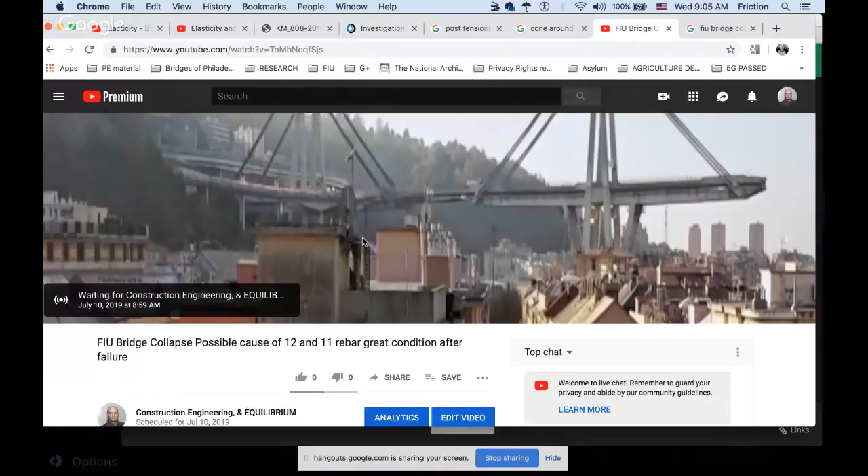Testing, testing. Okay, testing, testing. Okay, test.

All right. So we're going to talk about the reinforcement and why the reinforcement looks so great. Don't want to lose that image, but it looks like I am going to lose it. We're going to talk about why this reinforcement could look so great.

Well, it can't look this great if a force was applied to it. A force that could cause a bending in it, a literal bending, a deflection. So we need to have the concrete fail around this, around it, without putting pressure and deviation on this rebar. Keep in mind, if you put 10 pounds of pressure on one side of anything, you're going to get back 10 pounds of pressure from the other side, ultimately.

Meaning a piece of paper, you put 10 pounds of pressure on it in the air, of course it's going to break. But if you were to keep applying the 10 pounds of pressure on the paper and allow it to take its path, that is down to the floor or to the ground, ultimately the paper will stop and your 10 pounds will be met with 10 pounds of counterforce back at you. The paper may have a depression in it or may not. This shows none of that depression, if you will.

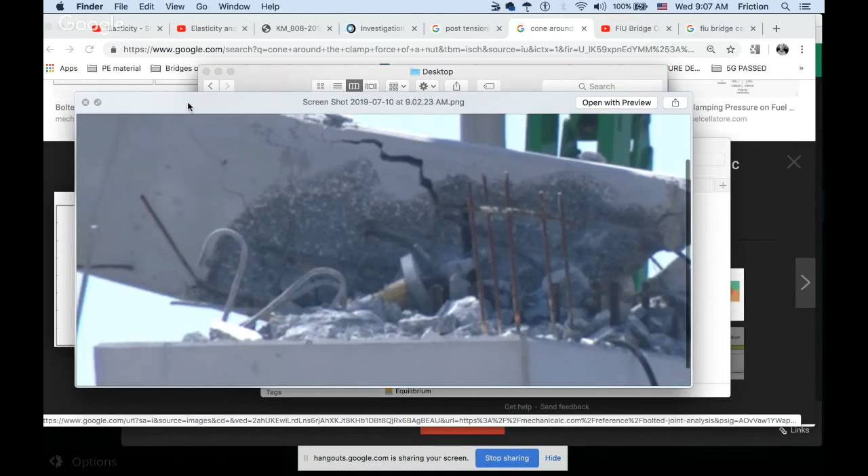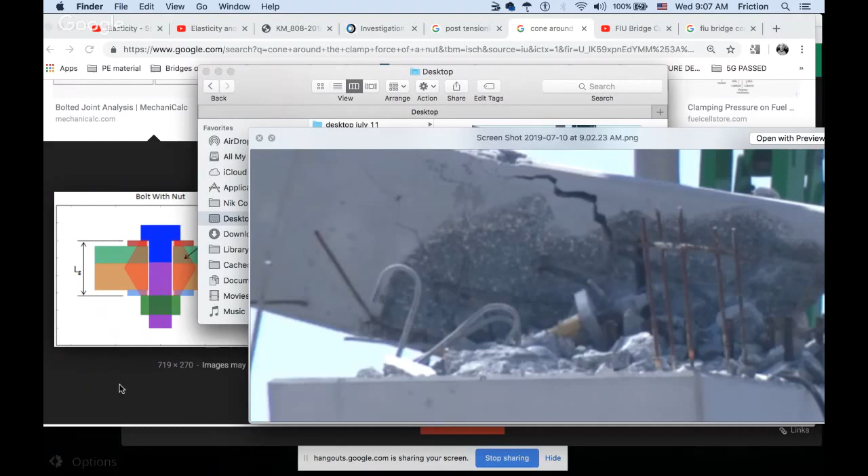So let's talk about what I think can help you explain this. Well, whatever we come up with, we have to have it pretty much that the concrete around it is in equilibrium, fails equally, and releases from around the reinforcement. Do not get confused with post-tensioning, Hooke's law, like a spring loading idea, with the rebar. The post-tension bar and the post-tension tendons are going to act in a different capacity. They're not going to be the same.

For the most part, they're going to give you equal loading on each side of the bar. The tendons in this bridge are going to have different loading on each end of the post-tensioning. They'll have a different force applied. The bar is equal. It's going to give us equal 288 kips, something like that, on each end. The bar has a plate on it.

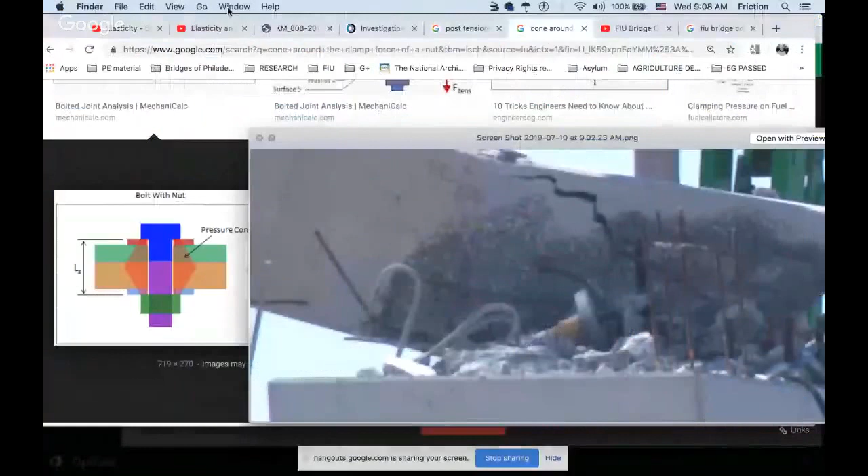I don't want any of my mail popping up just yet, so let's just go ahead and get rid of this stuff.

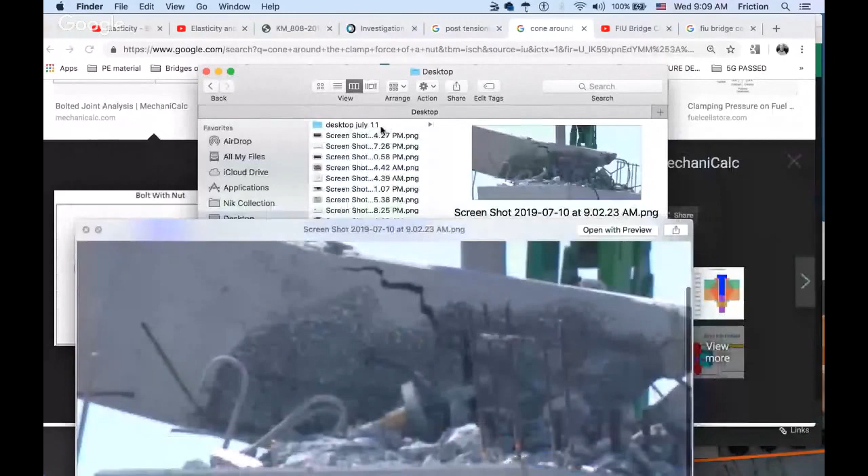So the bar has a plate on it, which will act more like a nut and bolt. With that said, the cone, pressure cone, is created a lot differently than typical. Could grab a different image. Just let me grab this one.

So again, we talked about this in another video where I said it's the back of 12 that could have done this. I know you could probably also say the bottom of 11 did it. Bottom of 11 didn't have any gas in it, as I like to refer to it, meaning no strength left. So I can't imagine it having the ability to do that. Also, you have to account for why the back of 12 is no longer present. The only way you can come up with that is a few ways.

One would be this disintegration, this cone I'm going to show you. The other is bumping here. And that's about it, as I would say, Forrest Gump. That's about it.

Another video, right? Let me just look at the thumbnails real quick. I love fiber. This is metal fiber. I'll get back to that. Another video, other channel. I'm going to race through this in a bit. Stone placement. As you look at the little thumbnails to the right if you're trying to figure it out. Let's try this. Works for me.

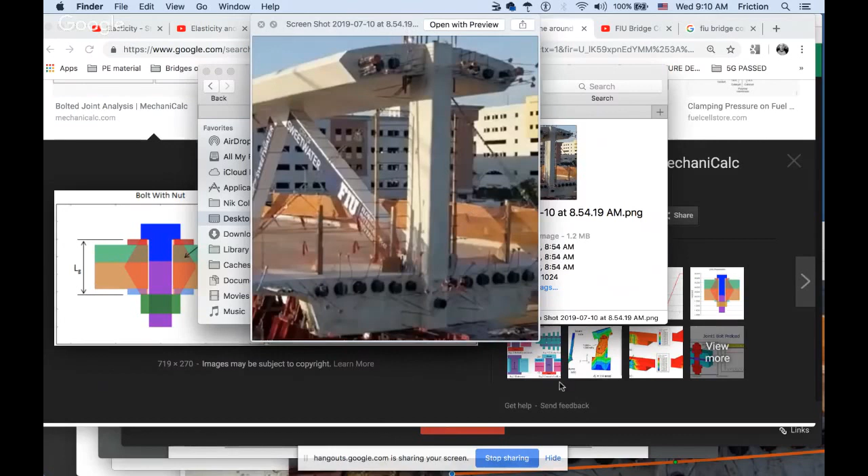So this little blister here, this little add-on to the deck, needs to be resolved. It needs to disappear and leave this. How do we get that? There's a bar inside here. Now, Newton, it's simple physics, right? There must be an equal and opposite reaction for things to be in equilibrium. So if you put 288 kips of anchoring here, there must be 288 resistant force back to it, thousands of pounds, 288,000 pounds resisting 288,000 pounds.

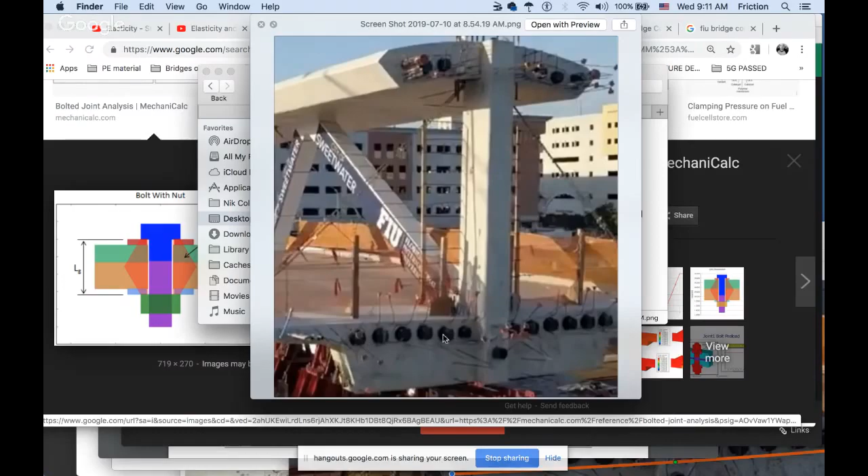This was done when they did this deck post-tensioning. They did D1. This is D1, and that's D1. This has a profile to it. These guys, D1 through D6, they're not all flat, as you can see pretty clearly in this image. They have a profile. They don't go straight across. I would run a line directly across them, which I don't have an image of right here. If I could run this line directly across, you would see that it doesn't work. I put it right underneath of that one, and then right underneath of this one.

You would see the plane is irregular. Well, this was designed that way. And we'll go across the top of number 3, and number 3 here, approximately there. You would see that this is not equal, and this is a terrible image because it actually looks pretty darn equal to me because of the angle that we're looking at it.

Let's move that out of the way. I'll put this one in dead center of that now. You can see it's a slight dip here. And so when you post-tension this transverse cable here, for example, across, if they're all flat, well, this reaction on this one is at that location trying to deal with the post-tension cable that's above it. Hopefully that's a flat cable I've got here.

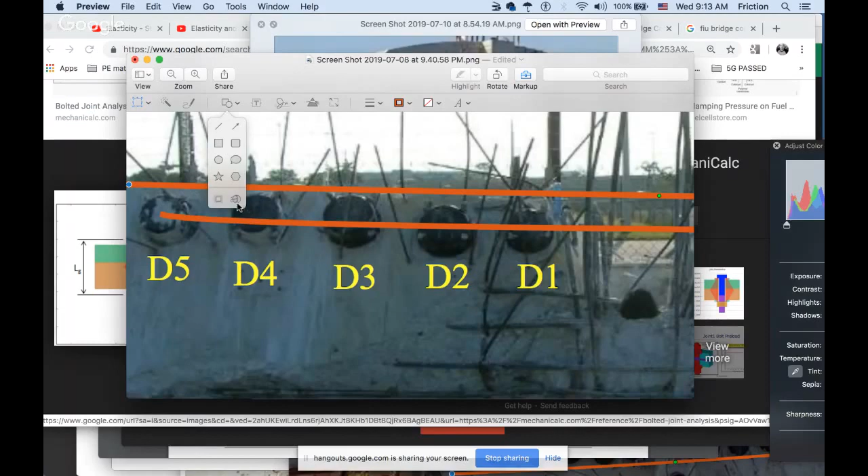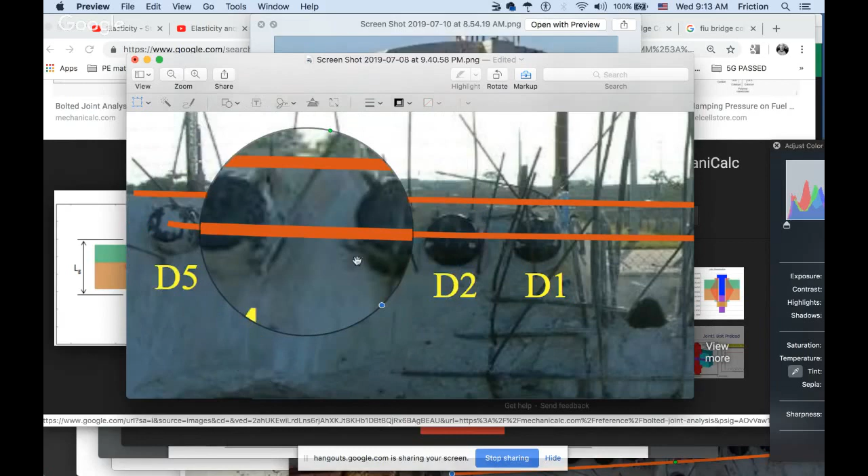And you see that this bridge, if you're looking at this angle, it's missing some materials at the very top. So I got to take a little liberty there, and so I'm going right here at the edge of the deck. There's the edge of the deck. I clip that section. I come to here since I got a flat point, and I try to make it parallel. Looks like I got to come down there a little bit.

Tilt this end up a little bit. Drop the whole thing down. Almost there. Not quite. There's still a skip right here where my mouse is. Come down again. And it's still a dramatic skip. But you can see this bridge. This bridge is not flat. This structure up here is not flat, the image we have.

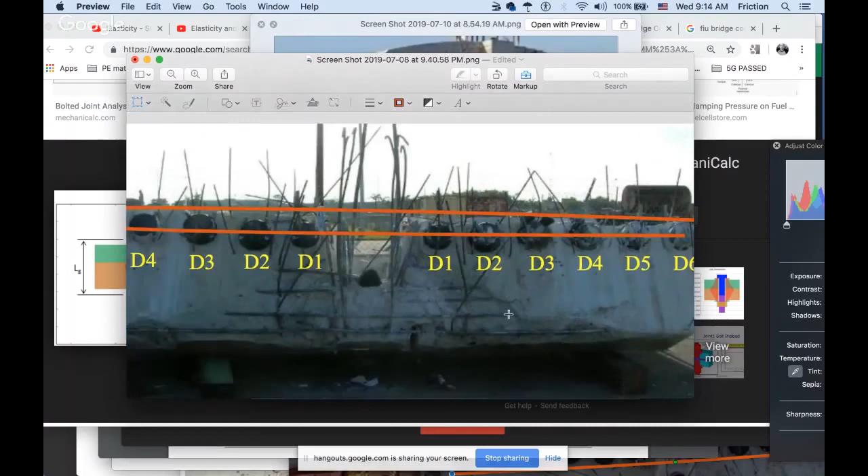So we're looking at a torqued image. This whole base has been torqued negatively or to the right, clockwise, if you will. 12 o'clock here, 6 o'clock here, torquing that way. So I don't know, is this placed evenly or not? And this will give you some false data if you're trying to analyze it.

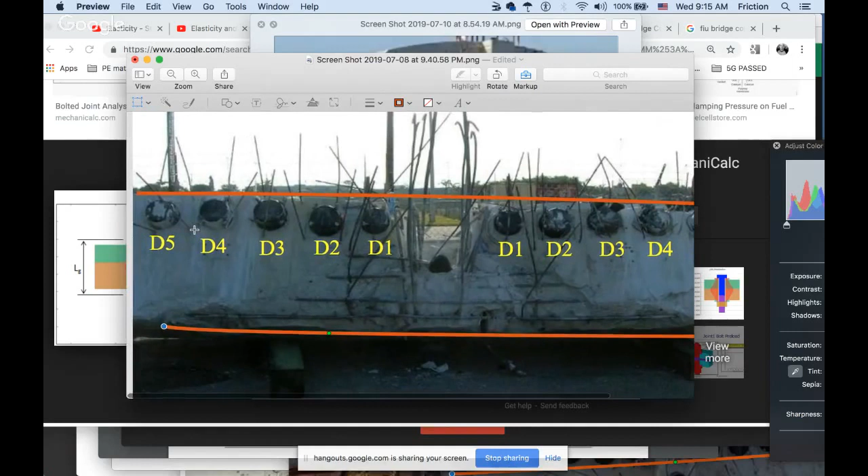But now analyze this. As you look at these 1, 2, 3, 4, 5, well, I don't know where 6 is. 6, it went over to 5 here. I don't know where 6 is on that one, but look at what you're looking at. Use your eyes and try to help out. 1, 2, 3. I like giving hints. 1, 2, 3, 4.

1, 2, 3, 4. Look where my mouse keeps moving around as I'm trying to do it. It's all over the place. It's up, it's down here to count this corner, and then this one over here, it's here. This one here, it's here. This helps you identify the curvature that I'm trying to help you see.

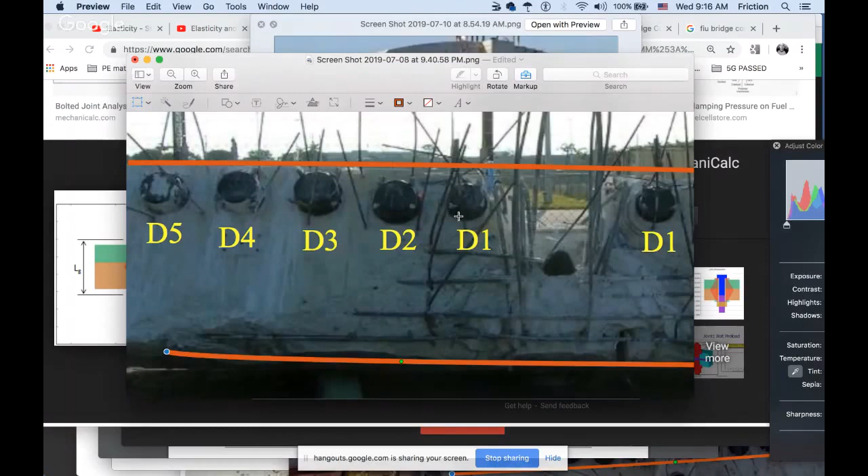Now, really take note of how the guy photographed it, or girl, and how we can see the underside of this. And in this one, it's got cement on it, so it clarifies itself a little bit more. This one, not so much. This one, we're looking more head on, and this one another way. So this bridge that we're looking at, the data we're looking at, is pretty damn torqued up.

We would like to see if it's kind of in balance also, comparing the right to left, but we can't get that. Remember, a camera is going to have the sharpest data we're going to get out of all of these photographs if they're not cropped. If they're not cropped and not edited, the sharpest data, the best data is always going to be the center of the camera.

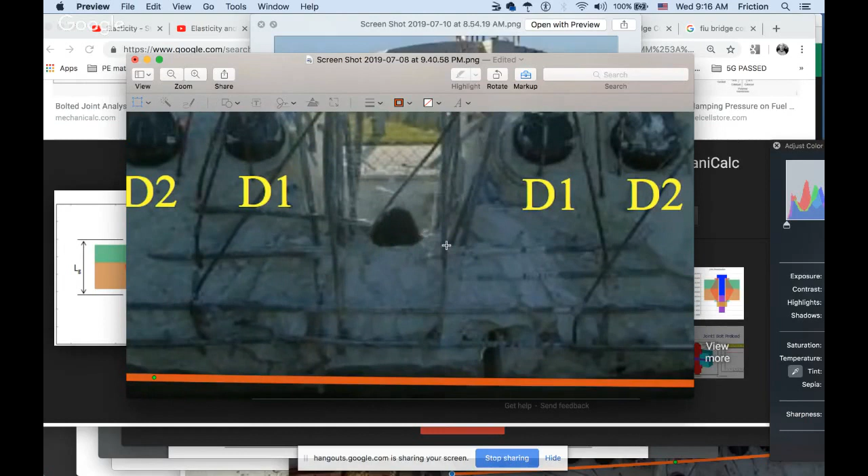Our least amount of distortion will be the center of the photograph, of a non-cropped photograph. And then as it tapers off in this direction, you're going to get your distortion going out to the corner. The most distortion down here, not here. The most distortion, the longest distance from the center, are the corners.

I'm going to put this on each one of the bolts on the ends, 1 and 1. And now I'm going to run this to this bolt, and then this bolt, and then this bolt, this bolt, this bolt, this bolt, of course that one, and that one. Now I'm going to run to the middle of these guys approximately, and you see the profile forming there. It's a downward profile and downward, way up, way up.

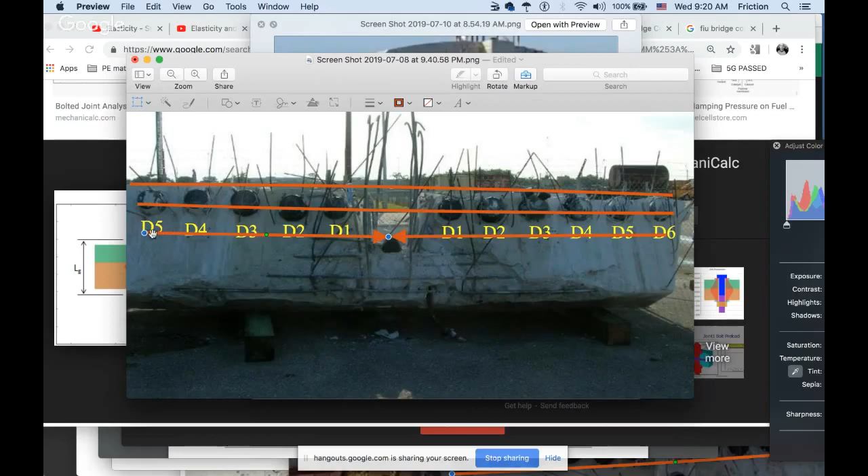Opposite. With that said, since this is pulling in this direction, it makes a compressive in. But these end caps that hold this thing from just breaking free also create a tension in the backside of them. They have a tension, they're trying to separate, but the compressive concrete around it stops it from separating. But it's still a tensile moment back here going on behind these plates. Yeah.

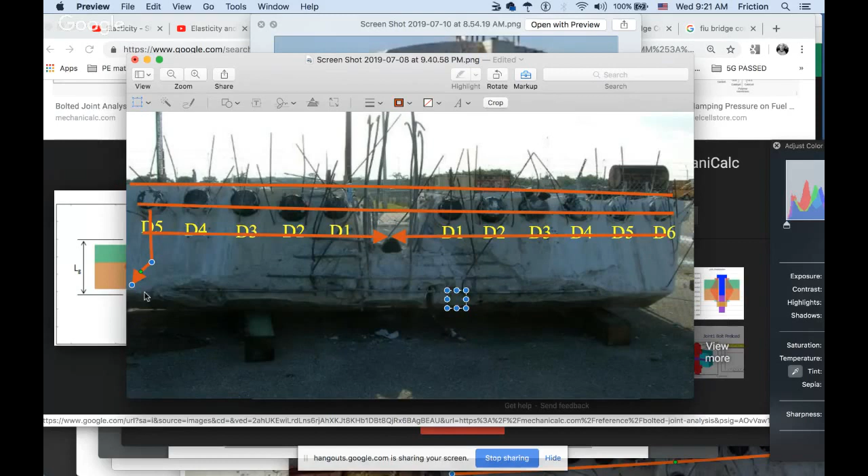Behind the plates on each end, down here and here, as the forces are trying to pull inwards, this plate wants to flex. So you've got another force that is kind of sitting there, on these corners. I put it on the corners. And that corner up there, kind of sitting on here, wanting to do something here.

Looking at bolted joints, so bolted joints on your engines and things like that. It's not typical, as I just showed you here, where I stated it's sitting there on the corners. Where it's sitting here, it's a cone, a pressure cone. That is what they theorize. It's a theoretical pressure cone, but this is the way they've determined the cone looks, in a free body diagram, if you will, this graph.

And so it would look more like a creation of this triangle here, kind of inward and outwards, right? As you can see there, kind of like that. And we'll straighten that out a little bit. So it's got this plate on it. This clamp force, these tubes have been reported to be ducted, to be grouted. Which changes it, it reduces the ability to slip, that's for sure, if it's grouted.

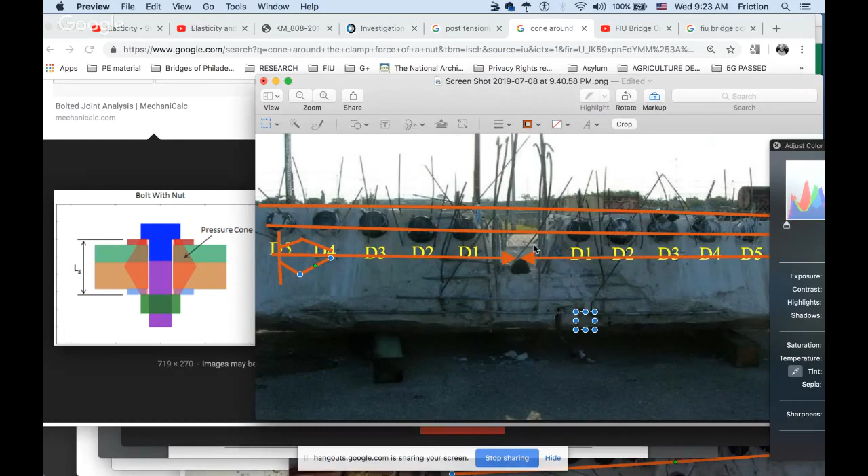But I state they were not grouted by the time they were post-tensioned, because they didn't show that as part of their process of grouting, I mean, of tensioning. They didn't say tension number D1 and then grout D1. That wasn't on there. So it's like a cone. Let's just take a little exaggeration of my beautiful artwork. So these forces around here, and on the opposite end, cutting to the chase a little bit for you guys, because I have to cut to the chase.

This is B, this is A, and this is B. This is in the deck, and this is in the diaphragm, and out in that little blister hanging out there, the one that's missing out here, that's not present. This, you can imagine, is a cone here.

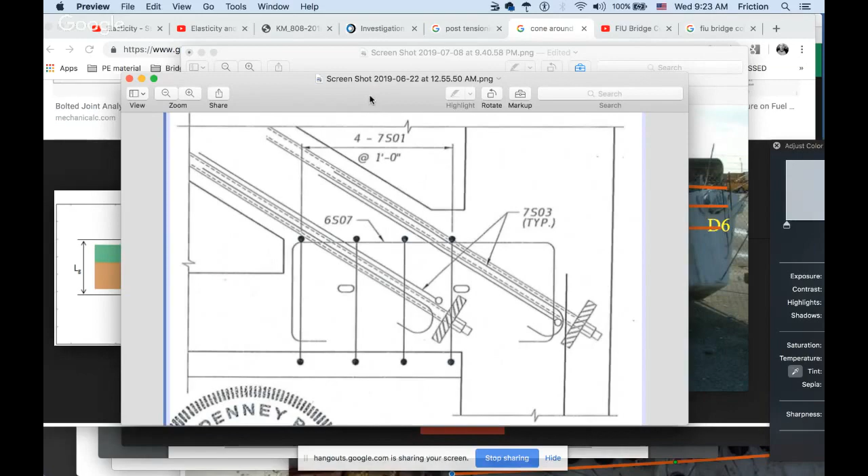This cone of influence is here and here. Cone is coming across here and here. That's a great amount of force that when this goes to fail, this is the part that will blast apart, freeing up this J-bar, and the same here. So this is what I think can explain the release of the concrete around it.

And that would be here on this blister. So here's our point inside here. Now this is the true image in the air, and I didn't deflect this line. This is a straight line we're looking at. I put it underneath of here just by a clip. And let's do this magnifier.

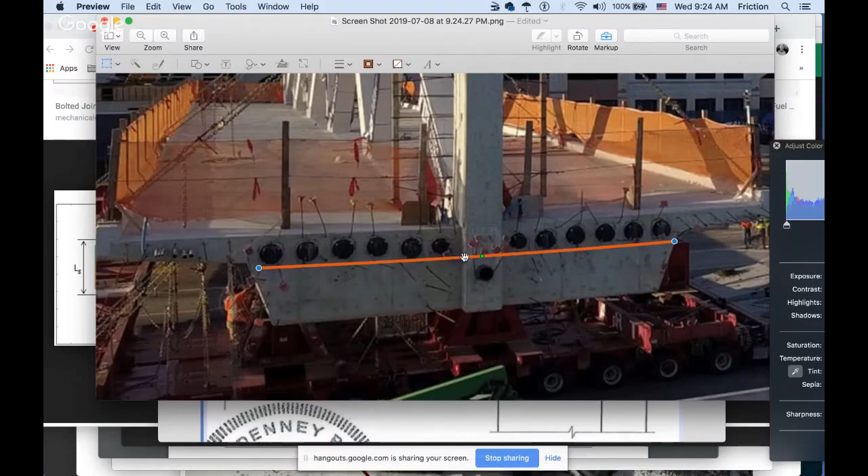But remember what I said, that the cameras distort as you go to the outside edges. This appears to be closer to the camera than that end, so even that matters. But the profile is stated as such. It is stated that it will be profiled. So these are not designed, as you look underneath of the line there, not designed to touch each other. That one's touching, to be in plane with each other. They're designed, that one's deviating. They're designed to be up and down.

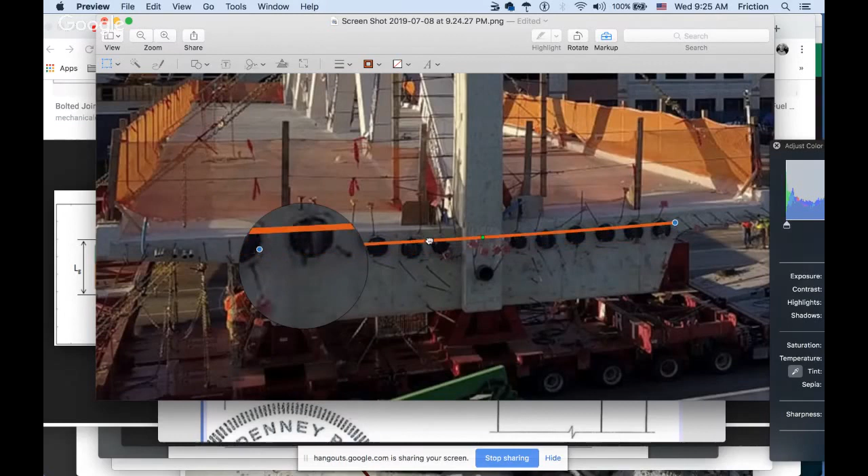With that said, they're supposed to be in equilibrium from left to right. So this one and this one are at the same plane. This one and this one is exactly at the same plane, supposedly. And the photographs are really bad, but I want you guys in other forums to really investigate how this should work. These are equilibrium going across. So yeah, this is higher in here than that one. But all I care about is D1s being in line with each other.

If we could find a photograph of it cracked like hell, you can start seeing if the post tension is failing, or do we have failure also of change of direction inside D1s, D2s, D3s, D4s, etc. This would have been data that would have been awesome to have when you were doing your analysis before they just started post-tensioning, to confirm that all these were at the same, that the post-tensioning didn't take on the new profile, which would have been crazy dramatic forces going on there.

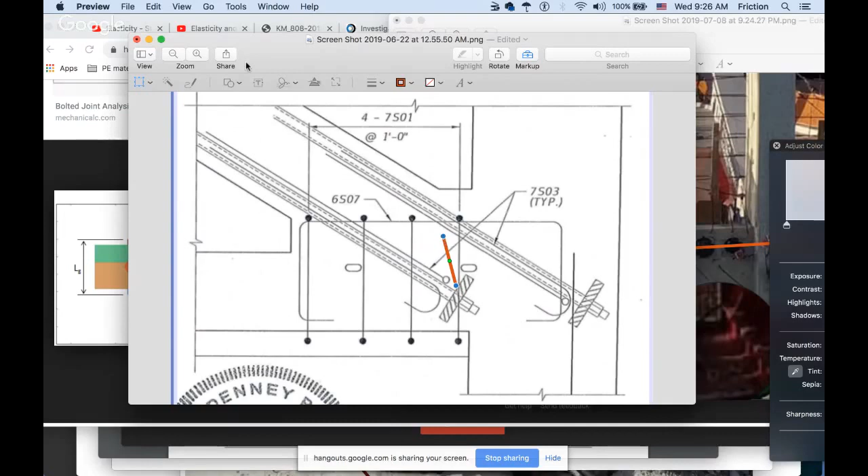So there's our cone that I just described to you. Now these cones will overlap each other. To help you visualize it a little bit, let's do this. Take a little liberty there. That's the default they're giving me on the length, so I'm not going to change the length on default. So that gives me my symmetry, if you will. Well, it looks like I just changed the length just then. Line it up with that.

So this is the cone. There's the J-bar. You then duplicate the same thing down below. You start seeing these cones are starting to overlap each other a little bit. Starting to have a little conflict with some of the forces. I don't have the rotation one on that, so I'm just going to do that.

So now if you look up Hooke's law, it will deal with the spring, and start talking about being equal in forces. But they don't deal with the loads at the end of the plates like this. It's just showing that forces are equal, proportional, and how to measure it. In this case, these are not proportional and equal because each end of this structure and the tendons have a different clamp force, a different ability. So don't assume that you have one end of the deck figured out and you figured out the other side of the deck.

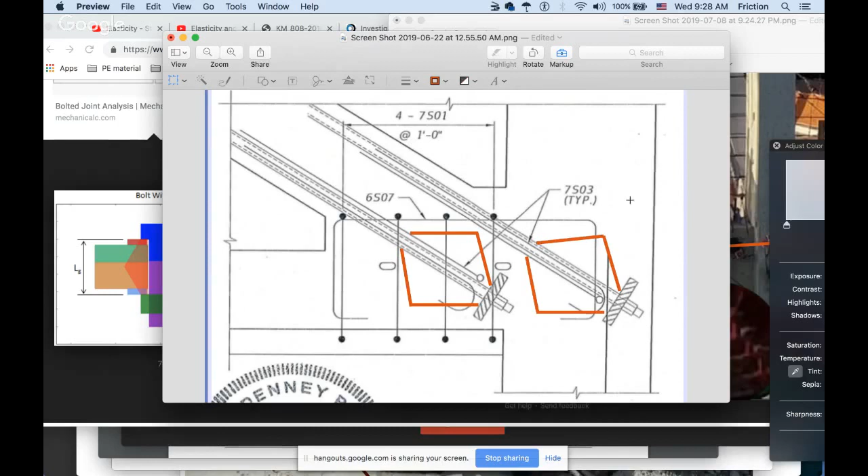So the transverse cables have different loads on each end, and so do the longitudinal cables. But the bars are totally balanced. They're equal with whatever force is applied on one end is applied on the other end. It's a bar, not a spring, not a tendon. Okay, so this is what the force is, just giving you an idea, and you guys can look this up, I guess. Bolted joint analysis, MechaniCalc.

Well, pressure cone is what it looks like. It's not quite the 45 coming off the edge of it, but I think there is a 45 coming off the edge of it. But their thinking is this. I'm saying, well, then what do you need the plate for? If there's no extra load coming out here, well, then we don't. This extra plate is just on there for no reason at all.

So I'm saying that the theoretical pressure cone is out here and not here. Their thinking, though, is your load. See the nut, the bolt is actually, follow that down. There's the path starting here at the bottom, back of the nut coming through.

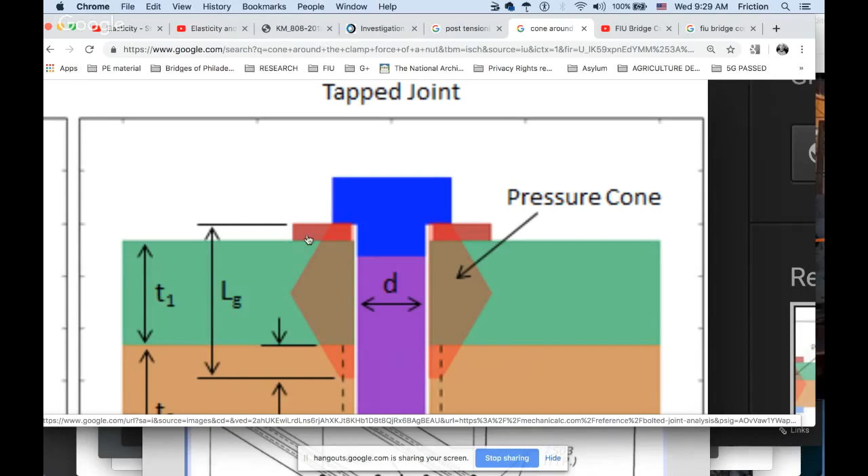But the plate being thick enough, I think, pushes it out to here, where with no deflection it equally loads this, and the pressure cone is out here. With that said, this is like the free body diagram. You see the loads are coming out here, and what are they doing then? Well, they're bouncing back in the direction they came. So I would think that, yeah, there might be more loads here, and then it slowly tapers out to here. But nevertheless, it's still out there, is what I'm driving at. So if you could extrapolate what I'm saying,

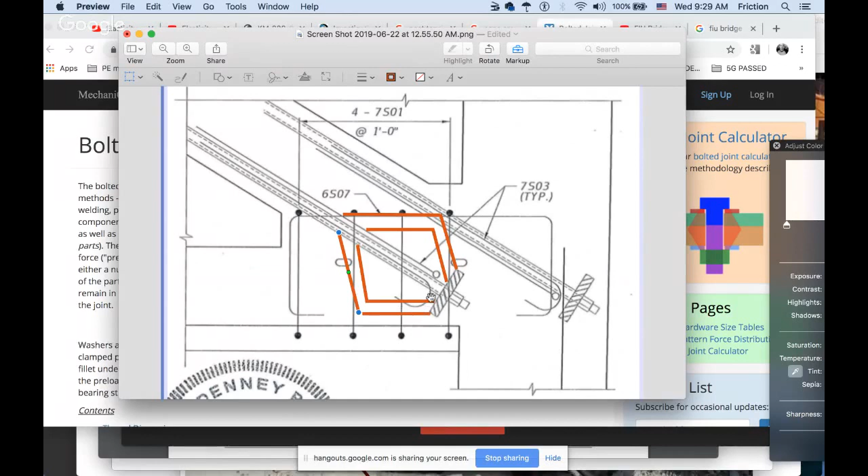leaving this like that, I now grab this one, and maybe I'll overlap it and show you an overlap of the forces coming off the base of the plate using the 45 and pressure cone analysis, meaning I'll come back inwards. Now we're totally encompassing the J-bar right here. And we just crossed into this moment, creating a moment here, very beautifully creating a moment here of all things.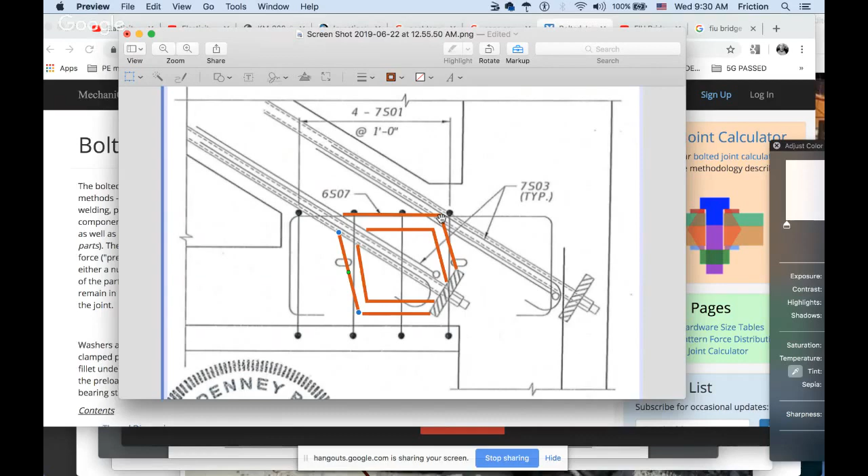You know, you've got to be careful of your biases. And so I'm biased at this point, I'm corrupted. I'm corrupted in that I'm looking for a reason why a crack exists all the time. And what I'm about to give you could be very biased. So you've got to take it with a grain of salt, because I would need further verification of this. But I want to show you a crack that's been driving me crazy that the pressure cone would resolve for me.

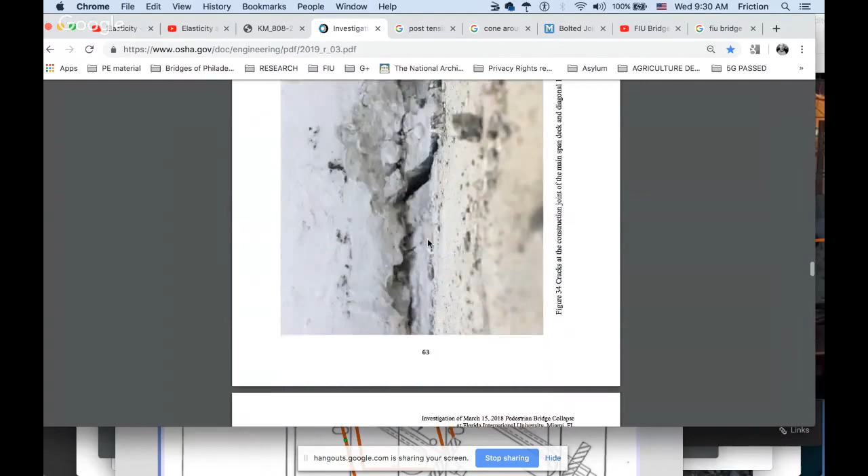And you know, I said I have to resolve every single crack, or I don't have it. I'm getting close. I'm there, but if I don't resolve every single crack, I don't have it. That's my statement. I can't give you 90% of the cracks and say the other 10 don't count. They were created by forces, and if I can't explain those cracks, then I can't explain the forces truly. I'm 10% out. That 10% could be 100% off.

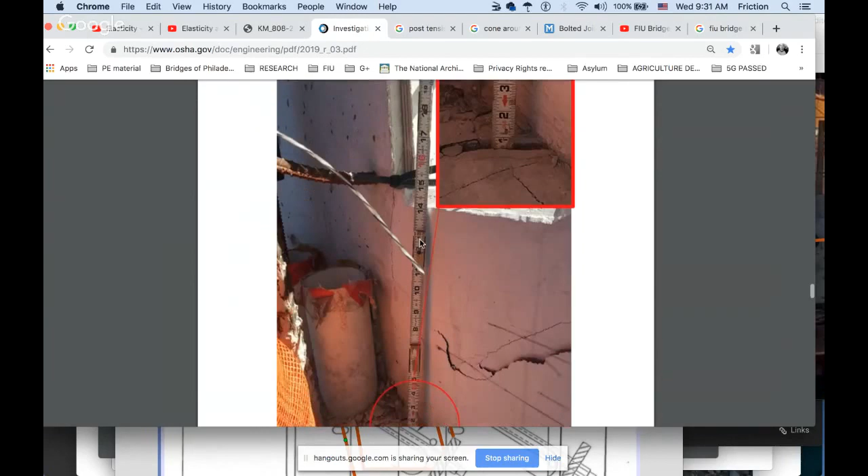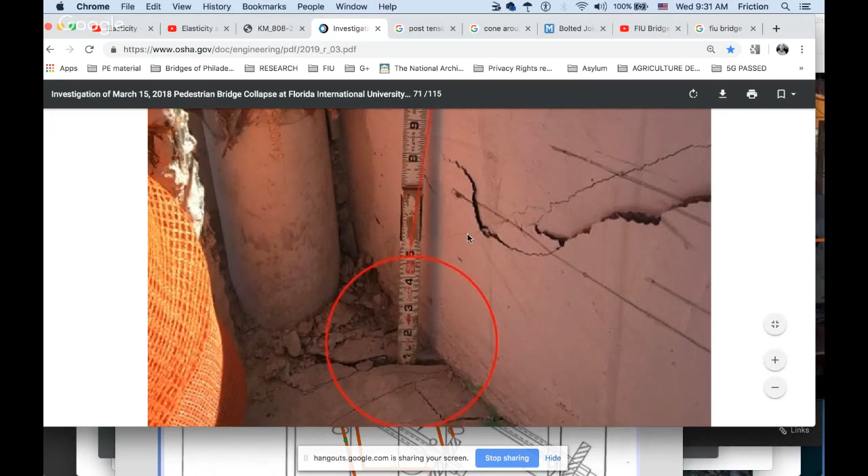This crack here is the one that's been driving me crazy. This one. If you look at this, it's just 1 inch into the hole using this side of deck, or it's 3/4 using this side. So at 1 inch, I can use this line here and I come up 5.5. So the reality is this crack is about 4.5 inches off the deck. I can now line that up with the post tension bar and try to figure out if it's in line with that. I use that same 1 inch on this side.

I come up here and I notice the crack starts deviating right about 8 inches and stops about 10 inches, which is really 7 and 9 if I take 1 inch off, approximately. I can verify that with the top of this, if I can figure out where they placed that. This is even with the top of this plastic. I then can go from 10 inches up to where it stops here, and this is where the direction changes. So I can say that's pretty much 4 inches, give or take less than an inch. It's about a 4-inch crack.

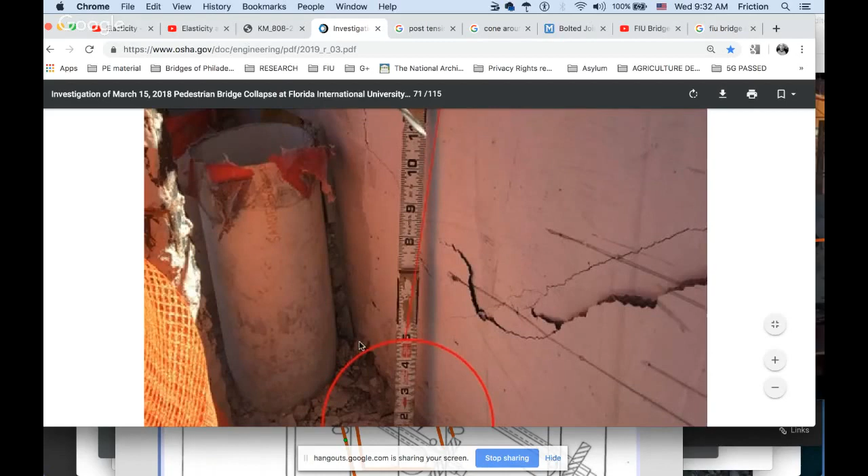So somewhere on the other side, but there's the deck here. That's what I was trying to resolve. So somewhere like that. And this is the pressure cone, which could create a tension crack, a pushing effect there, pushing 12 back away a little bit. We have the forces coming down, trying to keep this section in compression, though, also. So let's go ahead and put the other pressure cone on here, times 2.

Whoa. You know what? That would have worked, wouldn't it? Nah. The pressure cone appears to be more angular in shape. The liberty I'm taking with trying to flex it would not be fair.

I'm not trying to do any cheating there. I'm just being lazy and just throwing them in, sort of making them work. So I'm not saying this is the exact pressure cone dimensions, because I would guess the pressure cone dimensions would change based on the pressure. So as you add 50 kips, the pressure cone is smaller, and as you get to 280 kips, I'm just going to balance it out, the pressure cone would get larger.

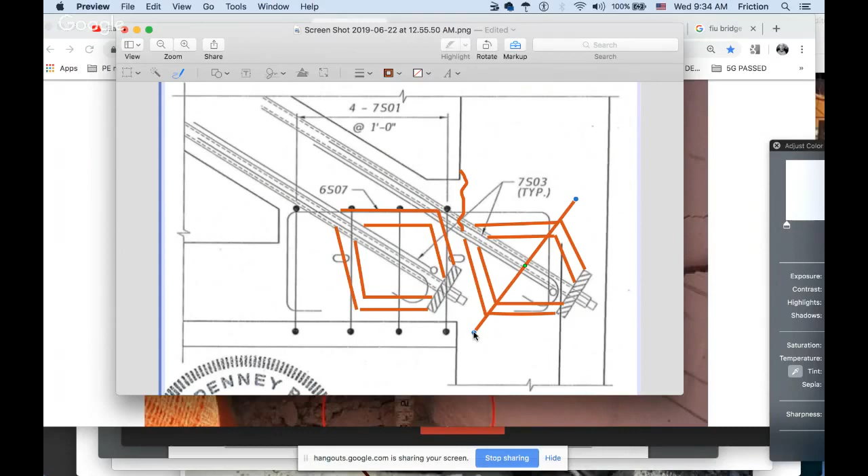I'm just trying to see how bad my triangle's off by using a straight line, and they appear to be off pretty good. Well, they're almost parallel, these two. So this would be like your pressure cone area. As you can see, this pressure cone area comes back like this, and that's the line also created on the deck. That would have that lifting effect of 12.

I told what's his name? I forget his name. A man from Jersey. I said, give me a minute. You know, I got other videos I was going to show on counter forces in many ways.

So this counter force is pushing up also, as it's creating a clamp force in this direction and a downward clamp force in the other direction from the other guy, putting this member 11 in compression. But it has no choice but also to go through this decking area.

And going through the decking area, you can use a few things here. Hooke's law, you can use the cone and the bolt theory, which here's the back of the bolt, the nut. And I guess I should have moved that over just a little bit. Now the load path would be 45, so let's do that. Let me clean that up a little bit.

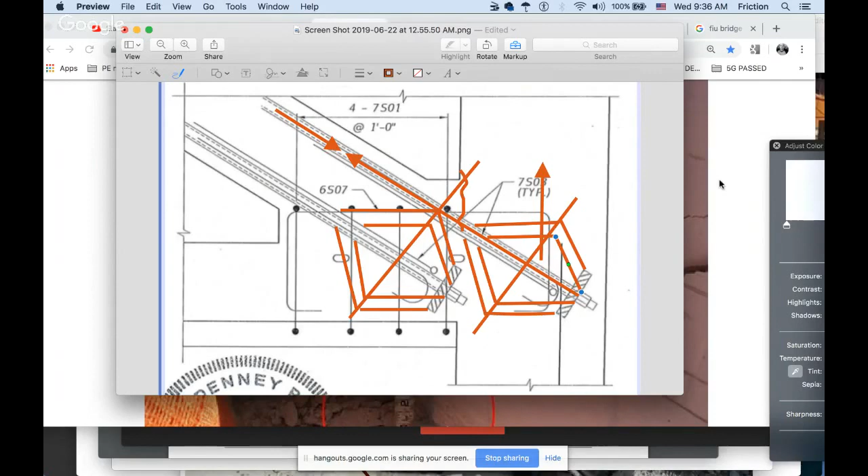My luck, I'm talking right now and there's no damn audio. Let me check this. Hold on. You guys got audio? Hey, Embry. Nobody trolling? I know. Well, you're here, Embry. Come on. No, I just dropped in here. 9 o'clock in the morning. No FIU bridge people at 9 o'clock in the morning, I guess. Let me confirm my volume. Here, Embry. Yep. Oh, the delay is very small, too.

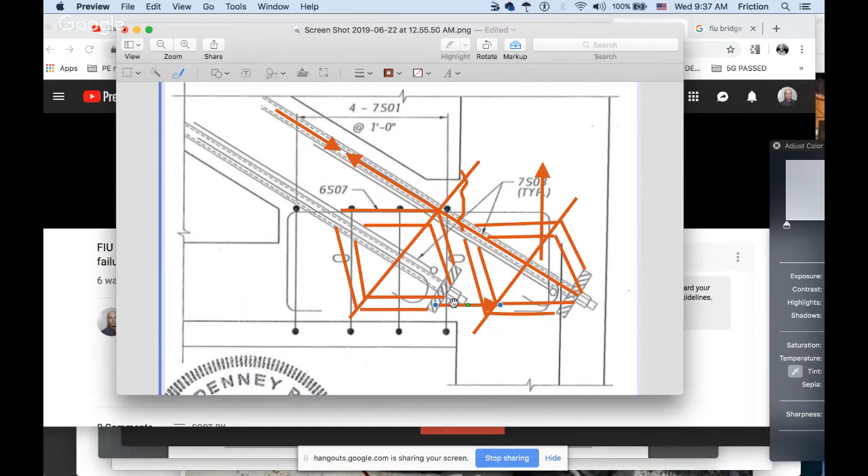So now here's our cone, and you can use Hooke's law, which is a spring deal, pulling back. Now, don't forget, though, if this is pulling that way, it's creating a tension in the back side of this. It's not for free. You can't just pull anything in one direction, right? When you pull on something, it pulls on your shoulder at the same time. Well, I would theorize, and I have not seen it, that it's a reverse cone.

That's my theory. If that's the cone there and everything's equal and opposite, we have a reverse cone going on, right? Well, we know it's not equal because 280,000 pounds of force would just have blown this out. So we have to determine, if everything's equal and opposite, what would it take to blast this off, and then say, well, this cone must be limited to this equal and opposite.

It's just a thought. Or we say tension in concrete is not what we think it is, because they don't do tension in concrete properly. They don't do it as it really fails. They don't really measure tension properly. They use a splitting technique, and I think this 10% rule of tension is way off. I go out on a limb with stuff like that, but I don't think the way they're measuring tension in concrete is correct, because equal and opposite, it's just weird, right?

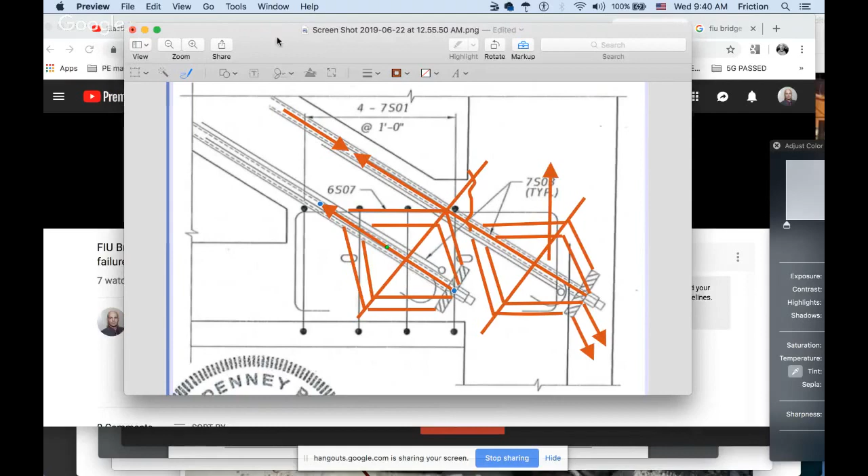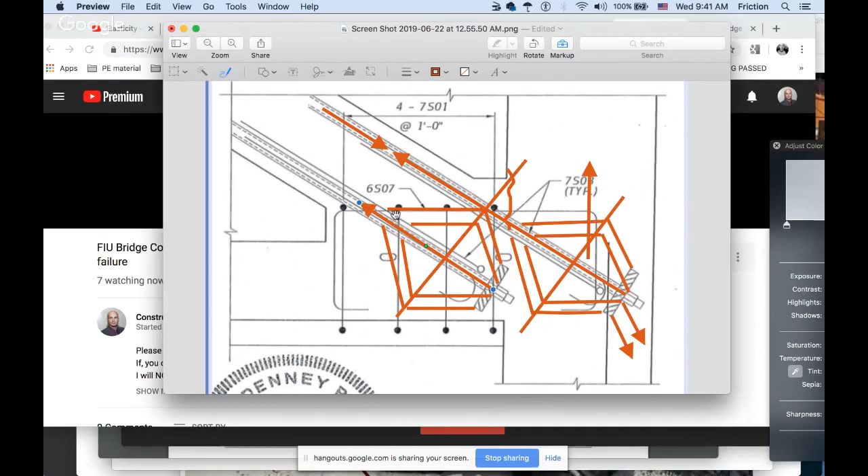This stirrup appears to be in line with our cone force. So, my theoretical cone force, and that's just by luck. I didn't do that. I did it live with you guys. I didn't do that trying to be biased on that one. Maybe subconsciously I did it. So you can see that would create a bending in a compressive moment in your stirrup system, right at the top of where they're interconnecting, sort of in that theoretical one.

I just want to give you the cone thing again. Where you go, cone? Cone head. Oh, it's in a tab. Okay. So there's both the joint analysis, right? You guys can chase this down for some time. Here we go. This works for me. There's a cone again to the right. There's your cone. There's your zones. There's your pressures. It's your computer analyzed pressures. Here's another version of it.

That's all. You guys are upset by that? Then I troll. Then you've just been trolled, and 20 points goes to me for being able to troll you. I have a new joke about being trolled now with points. So if Embry wins on a troll like he did the other day, I give Embry 20 points. We hear you. Hey, Cognitive. So my friend and I joked around. We were driving yesterday in the car. I was getting points from him left and right. I was purposely messing up his sentence, like I was repeating it back and getting it wrong. Of course, I was firing him up. And I was playing. You guys don't know, I play too much.

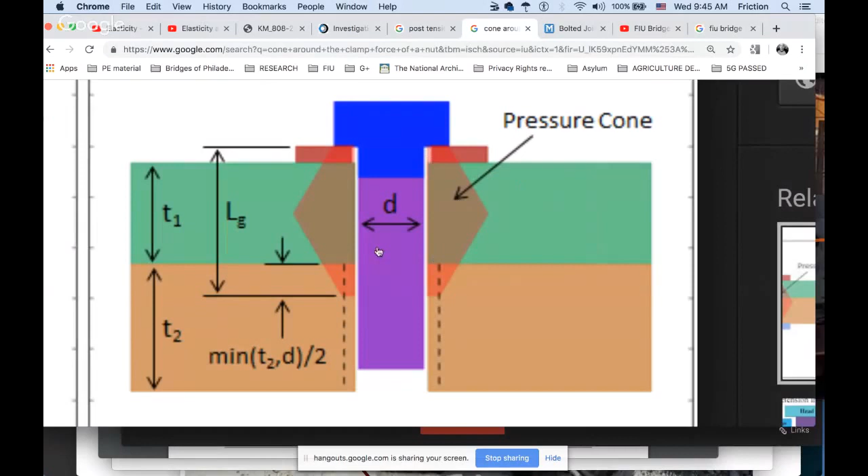And this is why they did not close down the structure. Their egos all jumped in, their triggers all jumped in. I can't be the one. I can't have messed up. So they try to fix it. Although Denney Pate's admitting that he's made a mistake because he's showing that he needs to do some repairs to it. But instead of them acknowledging it, going, "Great, Denny, you're admitting it, and you don't know what the cracks are," which they now brag about, saying that Denney Pate didn't know what the cracks were.

Well, you guys remember that I stated that if Denney Pate or any engineer comes forward stating, "Oh, I know what was wrong with the bridge all along," then that means they should have known then also. They can't come forward. So all these engineers stating that Denney Pate did not know, for example OSHA, and at that meeting, Denney Pate didn't know where the cracks came from. They all should have said, "Wait a minute, you don't know where the cracks come from. You cannot be given an analysis on how to go forward from this point then."

Until you know where the cracks came from. You just can't treat a broken bone if you're just going to send a person right back into the broken bone factory where they just break bones. You can't do that. You got to find out what did it. The doctor's joke: it hurts. Why does it hurt? Because I keep doing this. And the doctor says, "Well, stop doing that." Well, in this case, they didn't care what was causing the breakage. They just said, again, they're too big to fail.

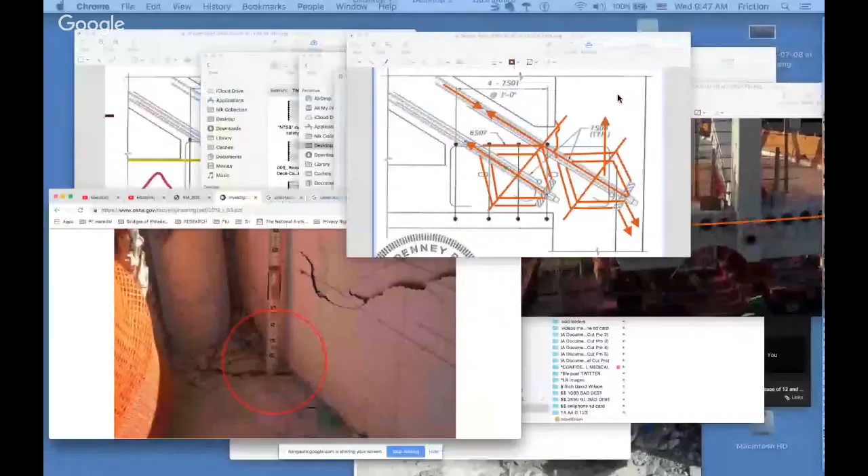So now I think I'm figuring out this crack here. This one here and this one. This is all part of the zone of the post-tensioning. And this is on 3/14 after the release of the loads. So the release of the loads, remember, everything's opposite and equal. And I said I would show this. These arrows here are going to explain it. So if this was holding everything together, because remember they did D1 first. So text D1, and I'm saying no grout at this point. So I don't care if they did grout. There is no grout at this point because no one's stating they grouted.

Escape and delete and grab. So no one grouted D1. No grout at this point.

And I want to say ones. I don't know, I just hate the word ones, believe it or not. It triggers me. Ones. Philadelphia, a lot of people say ones. It pisses me off. Ones, D1s. I never understood that for meaning multiple things. Saying one and meaning multiple. To me, that's like a conflict. Those two don't work together in my brain. So that's not a pet peeve. That's some shit I got in my brain.

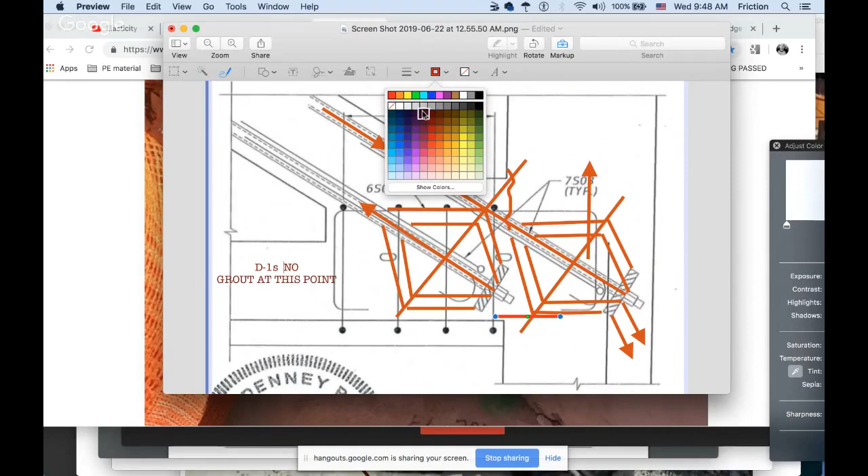So here's D1. So D1 comes across here. And let's change the color for D1 to a violet red if we can. And that didn't work. Let's go with blue. So D1 is coming across here somewhere. I don't know where. So right about here. You see where I'm going with this? So we got text.

But here it's designed with, let's get a plate. So there's your plate behind D1 on the outside of the deck. So you're looking at D. Great, awesome. And it's got a little bit of bow in it. Oh, it's the middle. So you're looking at D1 right here. This is D1 and that's D1.

So this is all they post tensioned so far. And then they're going to post tension this guy up here, A and B. B is the critical one, not A as far as I'm concerned right now. It does create a shear moment, I think. But that's another video. And, well, I guess I'll give you part of it now. But you see the crossing of that already between these two. You're creating a shear moment in there, but it's supported at this point in the staging area.

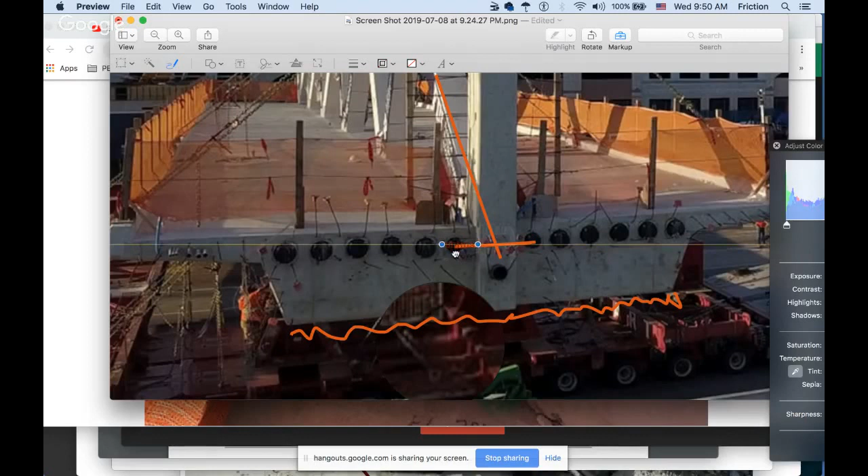In the staging area, it has shims underneath of here. So shims are all here holding this up. Shims with one S, right? There we go. So nobody sees it as a problem yet when they go to test it to release it. But Denney Pate did say grout the underside of this. But I don't think he understood the importance of it. I know MCM didn't understand the importance of grouting at that point.

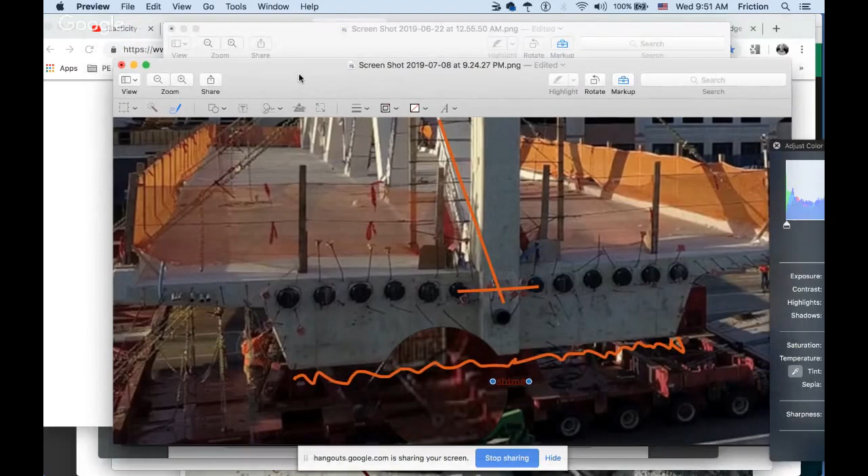The reason why I said I don't think he understood it, because they were chasing it. They didn't know why the failure was there. All Denney Pate did was point at MCM. Now here's one other option to that. Denney Pate did know that the shimming was the problem here, and he wanted to not throw MCM under the bus at that point, because it's a partner of his. You don't want to throw your partner under the bus, not knowing the bridge is going to fail. You would have thrown your partner under the bus, because clearly MCM is throwing Denney Pate under the bus somehow. Anyway, they're fighting each other with lawyers.

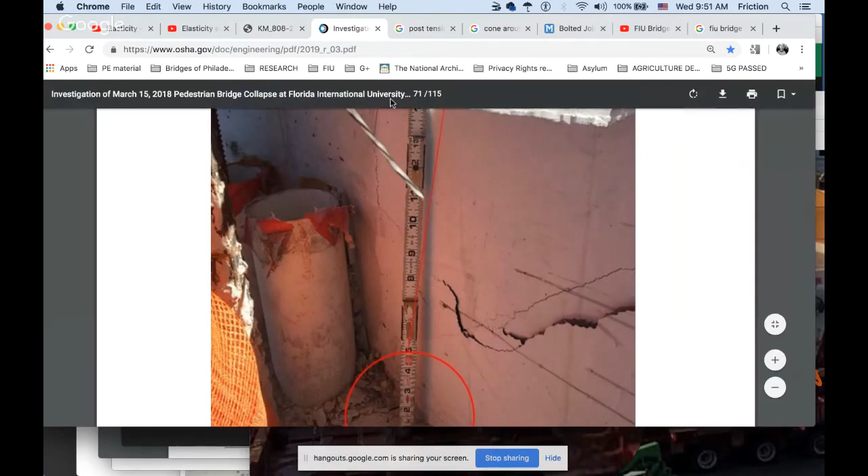Then I think we have the zone there. Where's the zone? So we got this guy, but remember they did a certain detail to avoid conflict zones. Conflict zones. And I'm going to use yellow. See, the mouse changes, so I got to start out here. So this is their way of spring loaded, if you will, to counter the forces they're applying in here to make it nice and even. But it still doesn't really work, because this end of the structure still gets less post tensioning than the opposite end.

If you guys saw my other videos, I showed that this end is less than the one to the left, the south end. So all the engineers and everybody else talking about it, just look at the post tensioning schedule. It shows you that the south end and the north end are totally off by thousands of kips in their ability to support and make a clamp force. This being the least amount of clamp force down here. So you got this clamp force coming across here in D1, non-grouted at this time, and these are not grouted.

Then they add the canopy, and that would be the canopy here. So the canopy comes across, and that would be the same as the one down below. This would be the same. These guys. So D1, no grout.

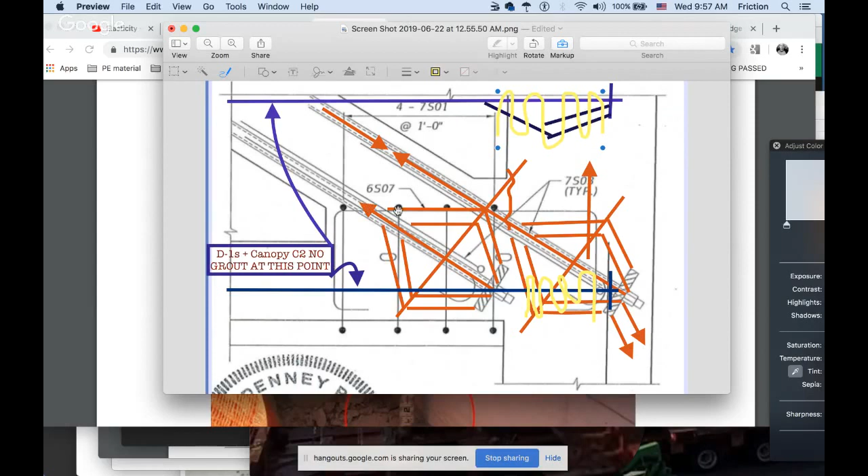These are just pieces put together with rebar holding it together until they put the clamp force in. So I know I gave you a bunch of data right there. So listen, this deck was done along with the blister. And then this was done. The only thing tying it at this point is the formwork holding it up and the reinforcement rebar. And then the canopy was built on top, and then the blisters.

Now imagine right then, if you did not add any post-tensioning on any of the structure and you just removed the scaffolding, what's going to happen to the structure? It might stay in balance for a while, and then it's going to fall over. It would be beautiful to know which way it would go. Computer modeling obviously told them which way it would go, I would hope. And then they added the forces to stop it from going in that direction. Obviously, the computer modeling didn't work.

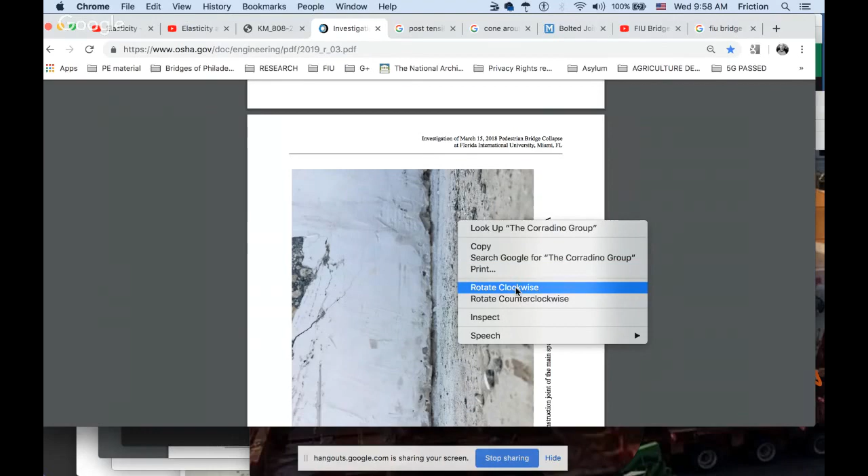What holds the whole bridge together at that point is the canopy, keeps the canopy deck flat by the post-tensioning in it. It also is held up and supports. Let's go to a quick image here of the rotate right. So rotate right, and I'm gonna end the video with that. I think rotate clockwise. So let's look at the pieces. We're going to look at it in my favorite way to look at it.

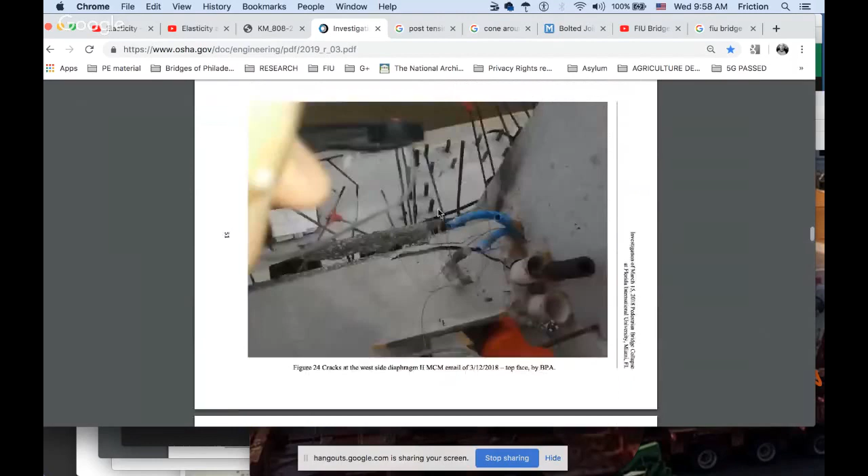So there's these guys. They're not in alignment. As you can see, this is up here. These bolts are here. These bolts are down here. These bolts are here. This is here. It has a weird-ass profile that goes in line and then drops down and then in line again. I think that, but it doesn't appear that way. Shit. I don't know where the VSL things were.

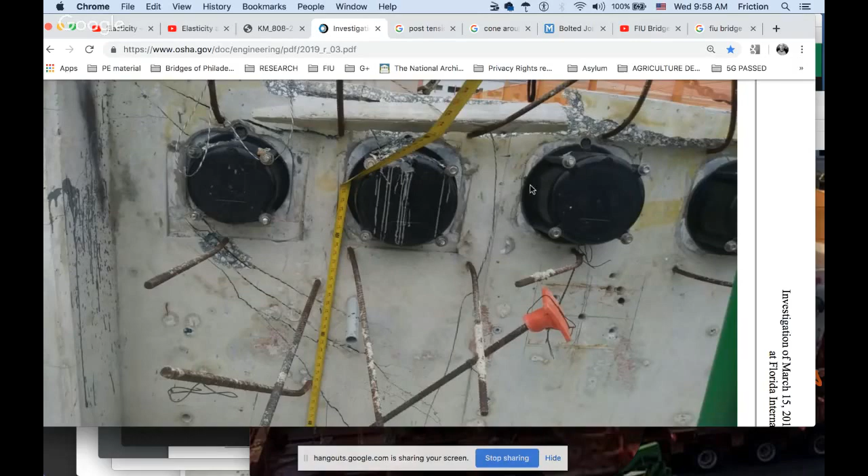I showed them in another video, the profile, and it shows that it's like a foot difference. It's a major foot difference in profile, but yet I don't see a foot difference here in real life. That's quite disturbing to me. But you can see these aren't in alignment. You look at it straight up and down, you see they're not in alignment. And yet a crack like hell already took place.

So are we already looking at a deflection in the deck? That this is already taking a torque downward. I wish they'd had more deck images. I swear that there's some cracking going on out here that they're not disclosing to us. Right here in this bad boy here.

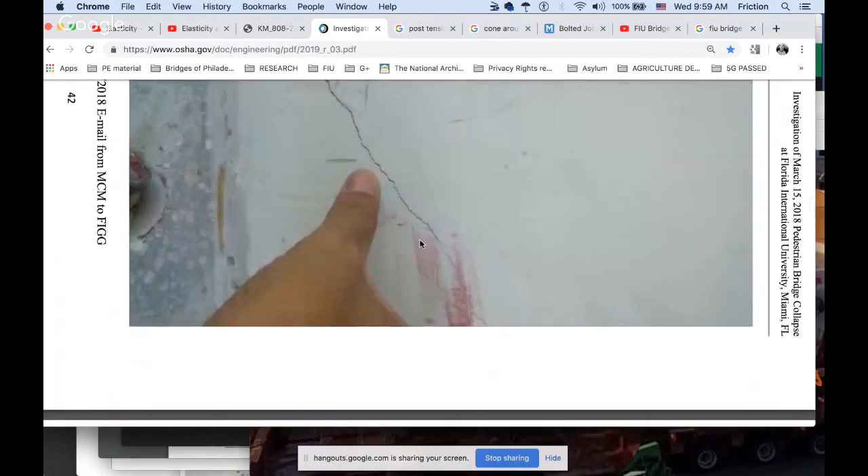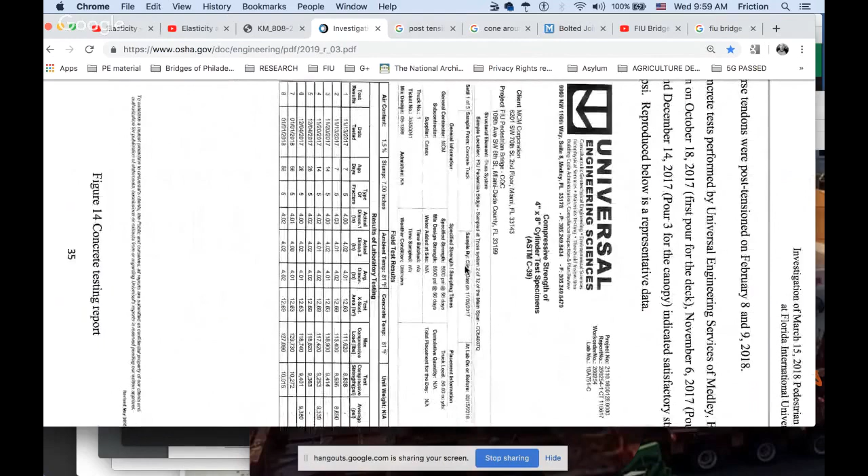Oh, you know what? I could use this one, but let's use the scaffolding one because it describes what I'm going to describe much better. So let's get to the scaffolding. Oh, scaffolding. Oh, that's concrete testing, wasn't it?

Now, can you imagine if the scaffolding is not holding 100%, you're going to get a false reading as you do next. That scaffolding better be holding the 100%. I was going to do a whole nother video on scaffolding and how it could have signaled, it's going to be the canary in a coal mine.

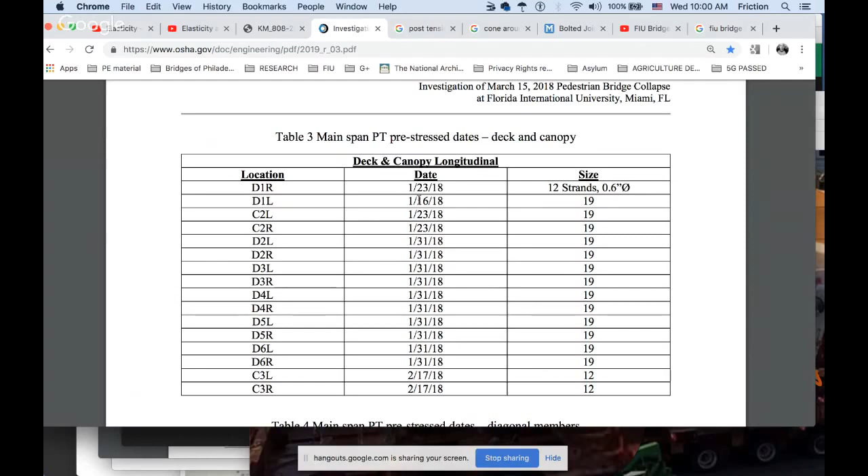The scaffolding was. If you're post-tensioning anything, and as you're post-tensioning it, you evaluate the scaffolding. If one side is becoming under compression, one side under tension, it's telling you what your post-tensioning is doing right then to your deck, where it's reacting. It's like a free body diagram offered up to you using the scaffolding. I always try to find something in real life to verify the forces, and I use things like scaffolding.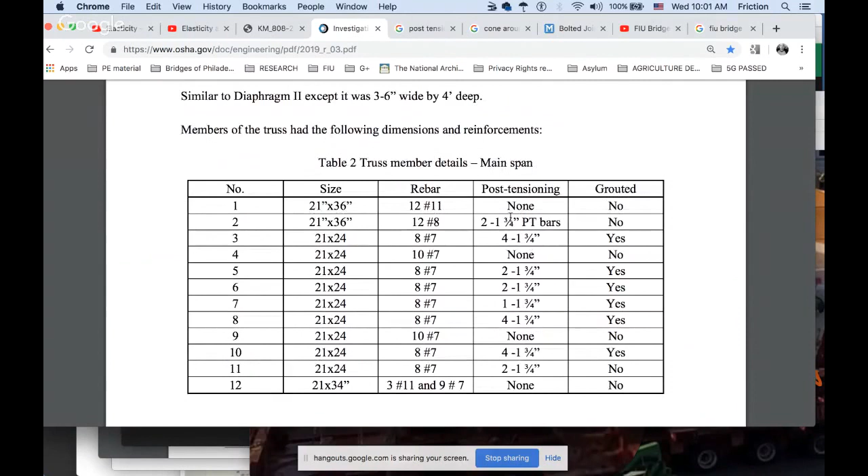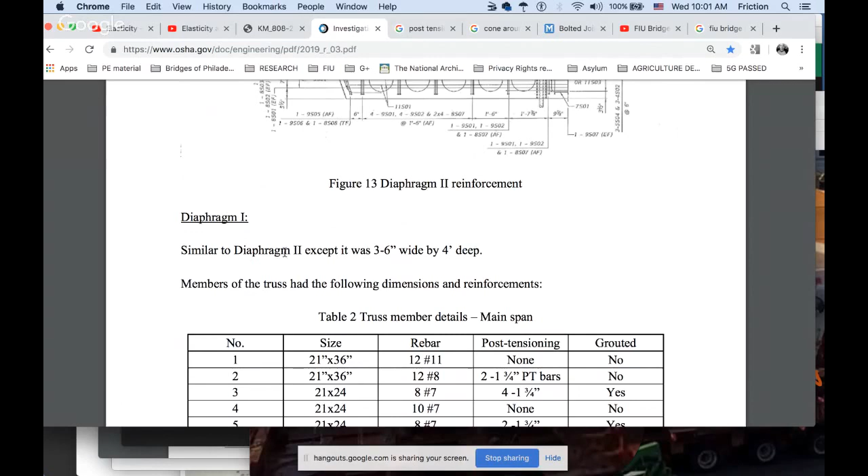Diaphragm 1, similar to diaphragm 2, except it was 3'6" wide by 4 foot deep. It is not similar. It is no friggin' way, and believe me, I want to curse, no friggin' way it is even similar. They're nowhere similar, the diaphragms. One is larger, one has 2 post-tension bars inside the deck. One has one in the deck, one going through, and one on a blister, if you will, that's in the deck pour. One has it going partially through number 12.

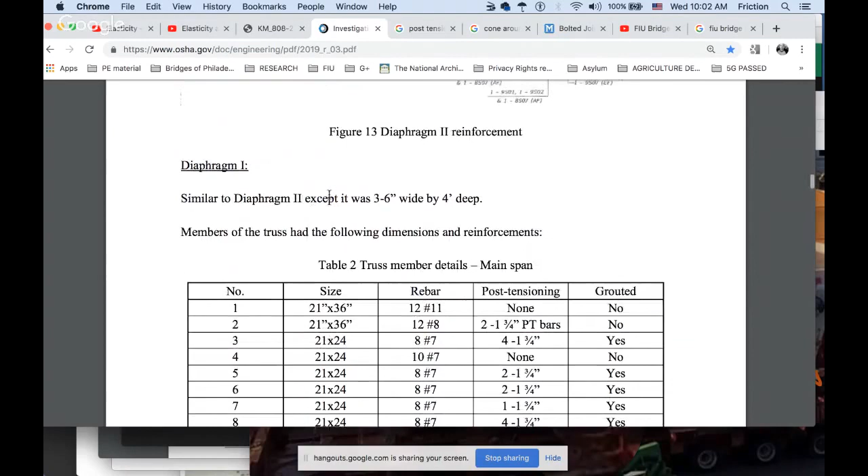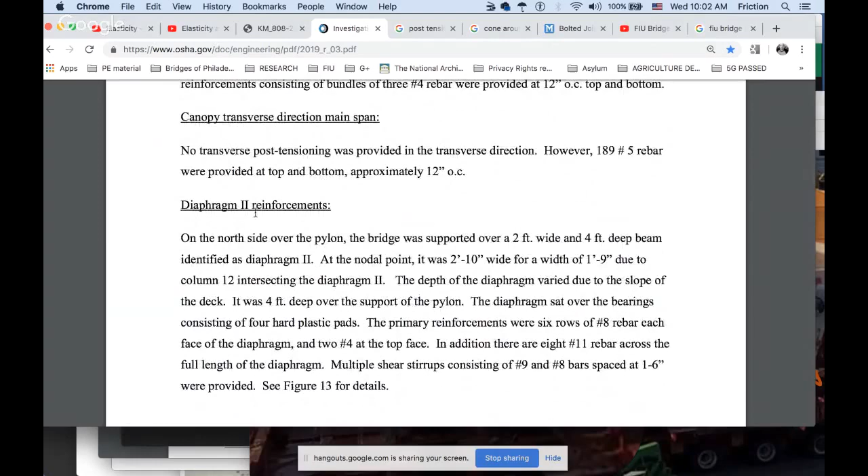The other one on the other end has it not going through number 1 at all. They're not even similar. It's not even the same thing. One has a hinge, one does not. One has the 10 inches sticking off the deck, one does not. One, the post-tension bars go through a 3-foot member, and the other one, a 2-foot member. They're not similar. Engineering-wise, they're not similar. Diaphragm 2 was supported over 2 foot wide and 4 foot deep.

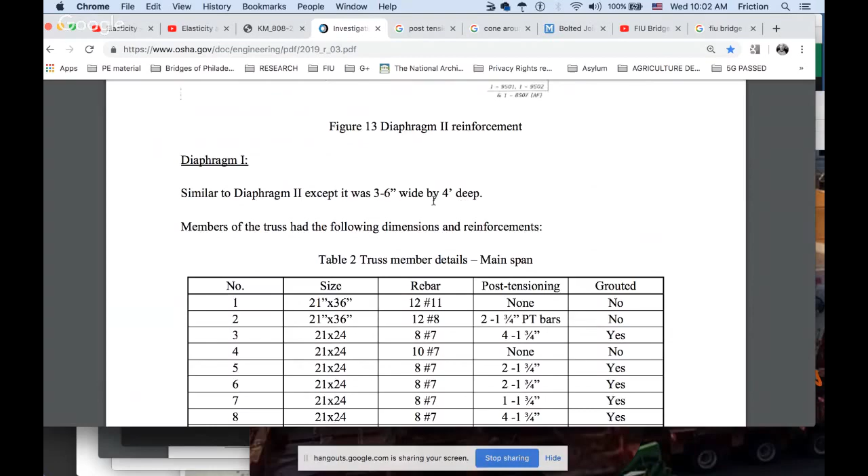What does 3'6" wide and 4 foot deep have in common? They've both got 4 foot in common. This one says 4 feet. That one says 2 feet. I would say 1 foot 6 inches is a huge difference in the base. So I find this to be nefarious in its wording.

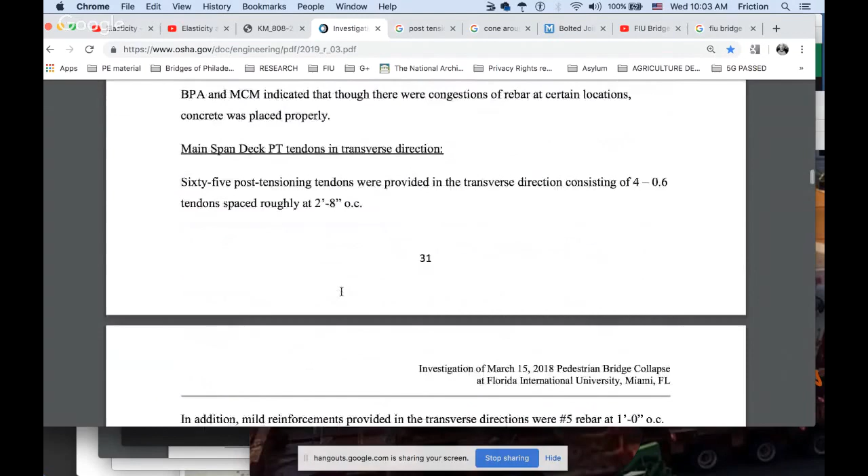I'm never going to get that guy to compliment me again in my videos. I burned that bridge. Get it? Burn that bridge. All right. Hey, this is for Embry.

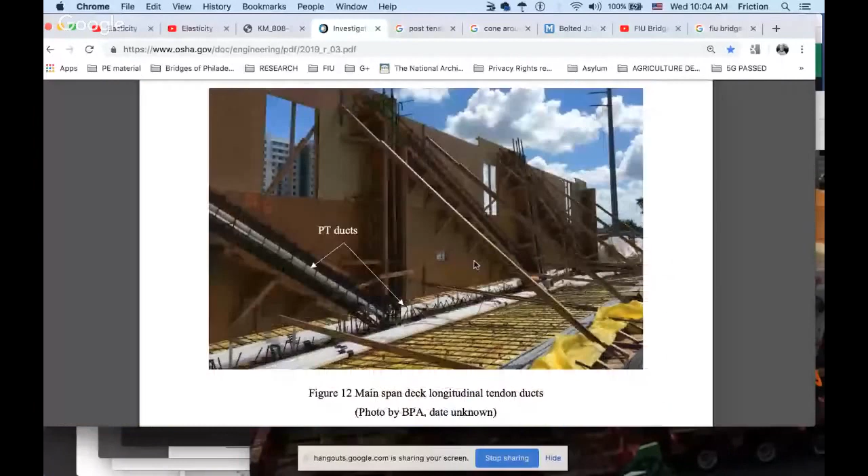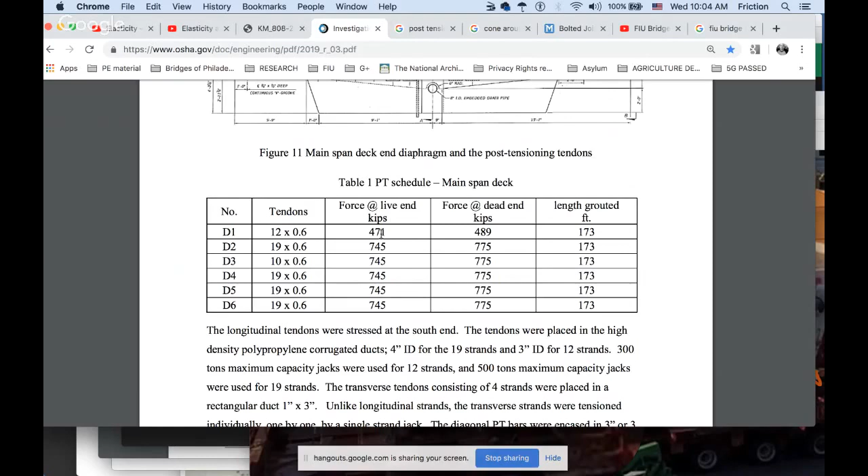D1 was 489 kips at the dead end. At the live end, it was 471 kips. Live end is where they post-tension on our end of the deck. That puts it off balance. So it's not the same from diaphragm 2 to diaphragm 1. Diaphragm 1, the larger one, has 489 kips, 489,000 pounds of force on that end. And on our failing end, we have 471,000. See, it's an imbalance in the deck.

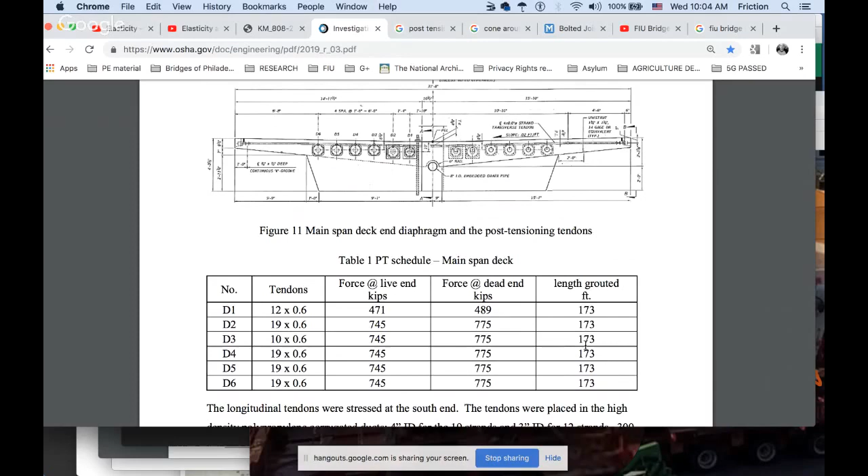And on the rest, D2 through D6, we still are in imbalance. We're coming up shy on the failing end of the structure. Down here, we're 745. That's an imbalance. It's 173 foot long. I'd love to know the elongation of each one of these. I find the imbalance in this post-tensioning to be wicked.

All right, so getting to my darn scaffolding. Command right, clockwise. So scaffolding is the canary in the coal mine. When they detensioned D1s, 20 points goes to me for triggering myself. Anyway, D1s, they would have seen, doing a survey, the reaction in the deck, literally a survey of the concrete, which would have been the best way to do it.

Or you can just use the scaffolding and try to figure out if you see any bowing or buckling, which would have been amazingly skillful. You'd have to measure it, put a string line along it to see if it's deflecting, basically. The string line is probably the best choice. Laser would be another one. It's just too many to do. You just had a guy out here on a piece of survey equipment. He'd be able to sight down and go, hey, we got a deviation in the deck now.

When you did D1, we got a crown here. Or when you did D1, we have a bow here. When you did D1, guess what? This took a torque, and number 9 or 7 is now rotating to the right or rotating to the left. This stuff is sort of idiot-proof that way.

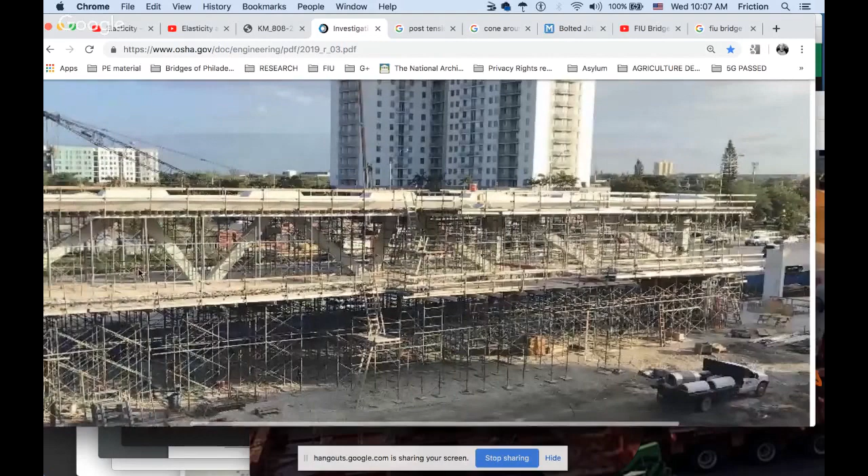Here's the question I asked you guys. Why didn't they just do number 11 and number 2 first? I'm being facetious. Clearly, when you post tension number 11 and number 2, no forces will go down 10, and no forces will go down 3. So you don't have to do C2 or D1, do you? You don't have to, because all the forces, when you put this in clamp force with your post tensioning rods, just stay right out here in the ends.

I'm showing you they knew that's not true. They knew forces were going down 10 and number 3. And they said, we only need a little bit of counter forcing for that. We're going to use D1 and C2 to help keep this rigid while we do that. Miscalculation, screw up, and they didn't add the grout inside there at this point before they went to D1. Nowhere have I found that they said post tension D1, C2, and then grout.

I want to end this video with that. I can run my whole system again for you guys as I give you all the data. I've got tons more data to give you to prove this. Everything's coming around as I'm describing it to you. I'm biased in a couple of things, but I can't make it fail any other way at this point. I can show the release of this being recaptured in the format. I can show that a lot of the forces were being... This was acting like a permanent brace here.

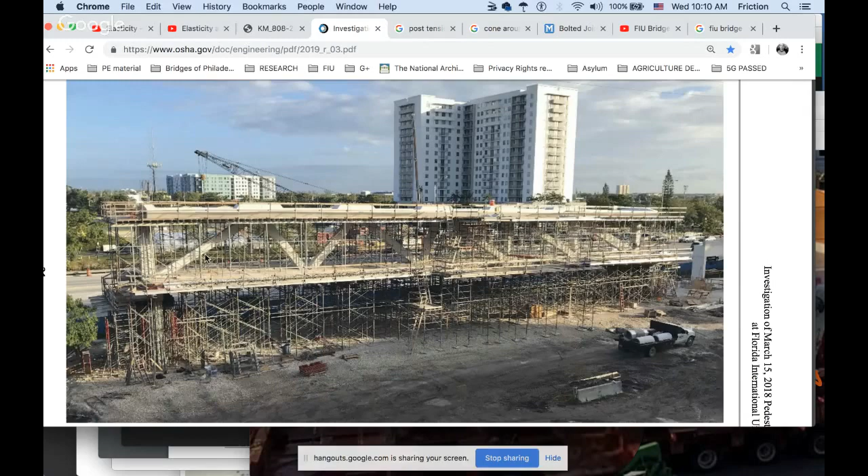And then they start detensioning, and then they test loaded with the dead load, but with, I believe, with shims here, but definitely with number 2 and the number 11 post-tensioned. So they never really tested it with it detensioned until they got it over the bridge. It just shows bad engineering.

Just these engineers that suck. And if you want to find the engineers that suck, just go over to Eng-Tips. And some of you guys that are over there watching it might be fans of mine. I'm not talking about you. I'm talking about the others. So anyway, so no points either way in that direction for a troll point, for trigger points.

So all right. So now they're over there having fun right now with the photography that I went over a million years ago about the pixels. And you could see, actually, if you get it down to pixels, you'll be able to determine what's going on with stability, what's actually being changed. They're still chasing after shutter lag, and I've already told you how you resolve that with just pixels. Now you don't have to do all that theoretical wondering. I saw their post on that, and I was like, man, I did that a million years ago, and I already told you guys how you do it.

Pixels. You need the real camera, the real pixels, and I stated how the pixels show the moment this was actually moving faster than the rest of the deck. You can then see when it gets balanced too, because it will come back to the regular speed that the camera can process. It's the processor in the camera. They got it down to the sensor only, and that's what another engineer on YouTube, he's got it down to the sensor. It's the processor. Processor needs to work this out.

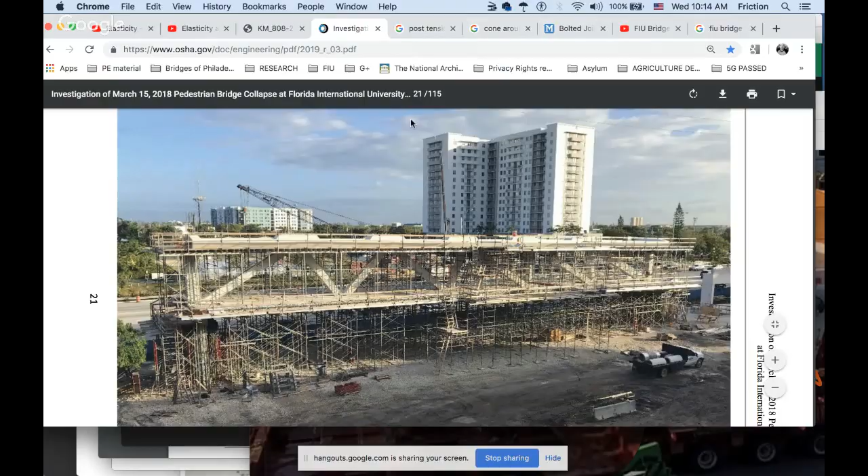I'm not going to go any further, but you visualize the zones, the counter forces. Damn it. I want to show you one more. So as they detension this, the forces down here, we can already extrapolate. They just released 288 and 288, or you can do half of that and just call it 288,000 pounds. It grabbed back onto the back of 12 only. So you can extrapolate 288 times 1, because I think we show no failure of number 1. So this number 12 is being held up by 288 kips, 288,000 pounds of force.

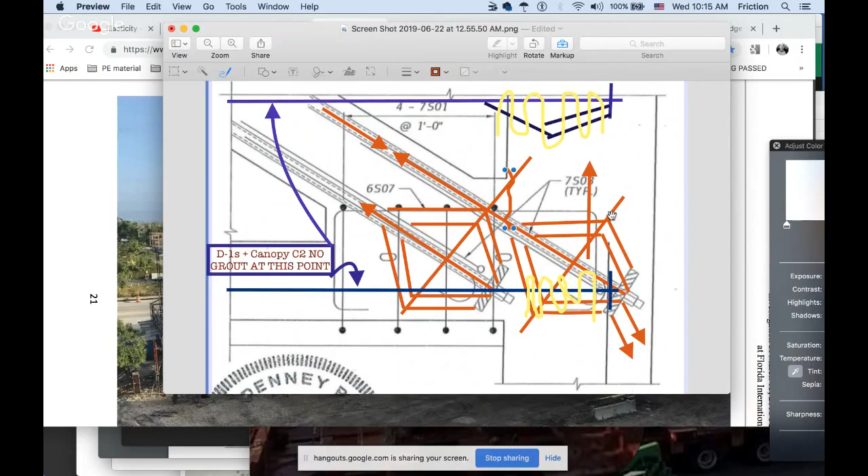For it to do that, you also have to add 288,000 pounds of force downward. So it has to be in equilibrium, or you get cracks like this. Or you might get cracks like this one that I said, because this has too much of an uplift. A negative load is what I was going to tell the guys over there. My brain's